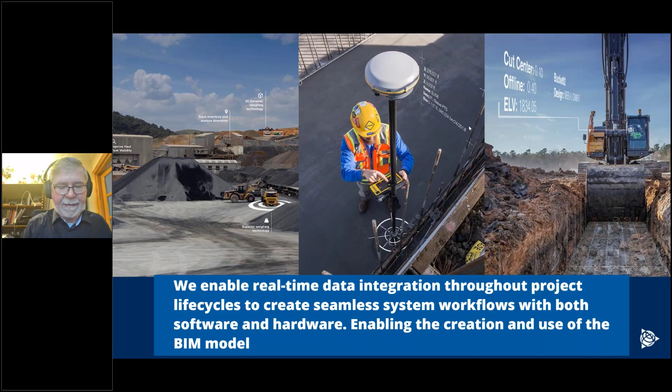Trimble has also worked over many years in completing the solutions necessary for full life cycle management. So from data collection, creating a model of the real world, preliminary design with solutions like Quantm, where you can optimize the route between 2 points, detailed design, Tekla Structures, NovaPoint,

construction itself, managing the data flow from the design to the field, to machine control systems, to surveying equipment, and data flow from the field back to the office. Scanners on machines, drones, updating the design environment.

And into the facility management phase, managing the infrastructure assets. And Trimble recently purchased a new company called Agile Assets, who have over 25 years experience in managing infrastructure.

So, on to Trimble Quadri. It has a long history, been developed within the industry by engineers for engineers. And the goal of Trimble Quadri is to provide a collaboration platform for infrastructure design, construction, and facility management, connecting the project lifecycle from start to end and from start again.

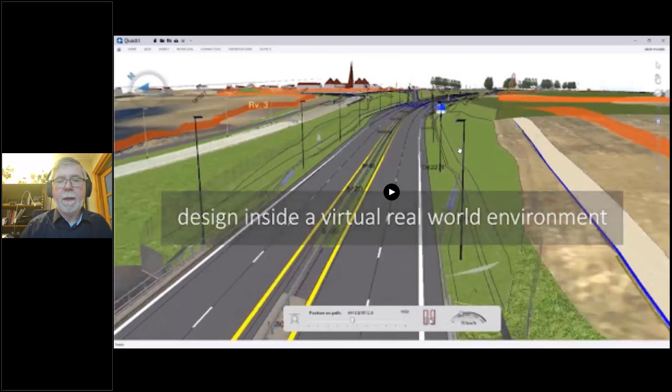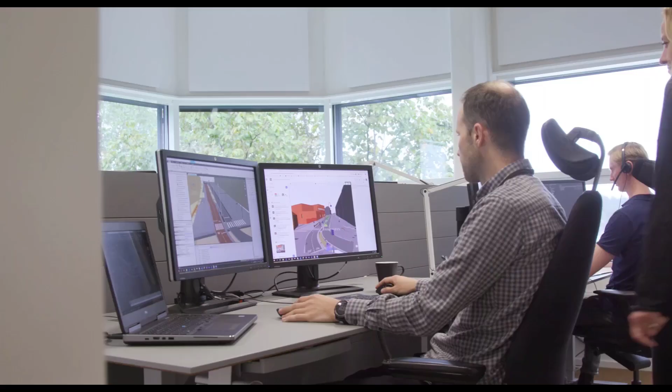A quick video just to summarize what I've been saying and what I'm going to present. To meet the current and future needs of designers, contractors, operations, and the industry as a whole, we need to work in one common data environment.

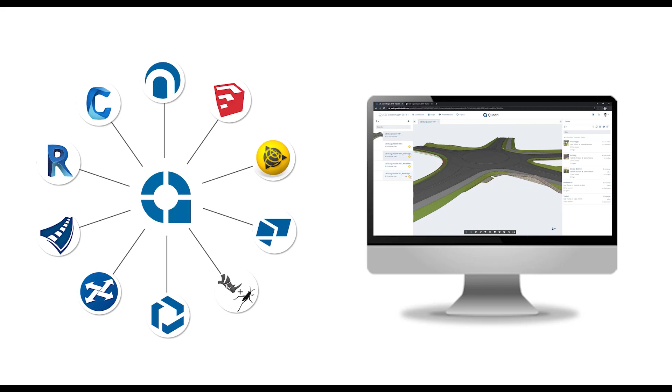Quadri enables you to communicate positioned, coherent information between all stakeholders, man and machine, throughout the project. Quadri is a BIM collaboration tool for civil infrastructure projects. It allows real-time collaboration in a central model where you keep track of changes and access the model from anywhere, at any time, and in any project, using your favorite design tool.

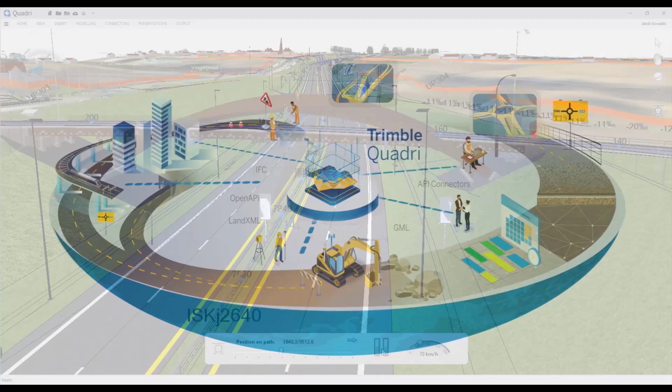With Quadri, you are in a multi-user and model environment where you can collaborate seamlessly across companies, domains, and geographical locations. This common data environment gives you access to different information from all the participants in a project.

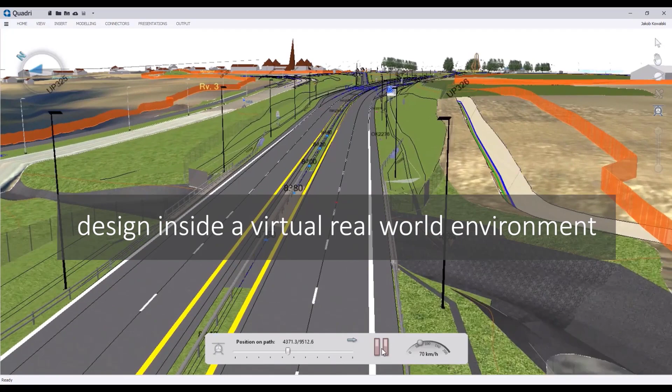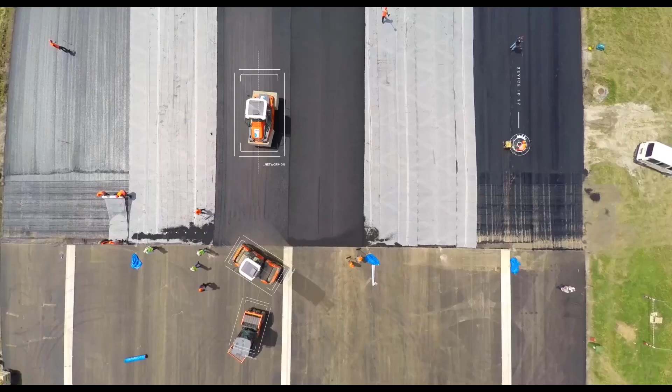The GIS world has taught us how to map the world in a unified way and how to describe the relation between real-world objects. With Quadri, we combine the power and knowledge of GIS with the geometric complexity of volume objects from CAD/BIM. When information is stored in a unified and structured way, multiple stakeholders can run their quantity takeoff, extract volumes, and export to open formats like IFC and LandXML based on geographical location. For a contractor, this means extracting the last version of all constructible data from one platform in a unified way.

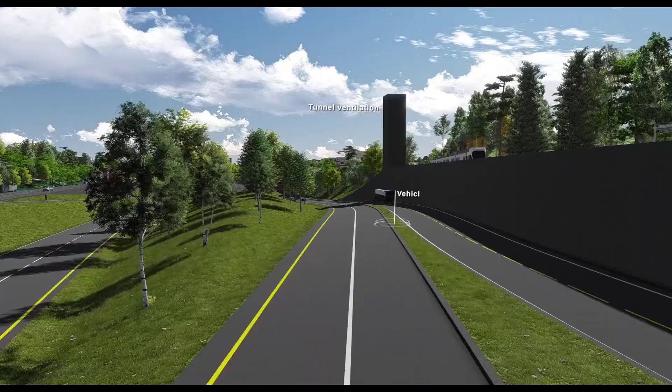Lifecycle management of infrastructure assets requires a strong ISO standard-based data model and a transportation network technology as its backbone. This is another one of the unique strengths of Quadri, bringing designers, owners, and contractors together in one unified single source of truth. As your BIM collaboration tool, Quadri sorts out the complex data exchange for civil infrastructure projects.

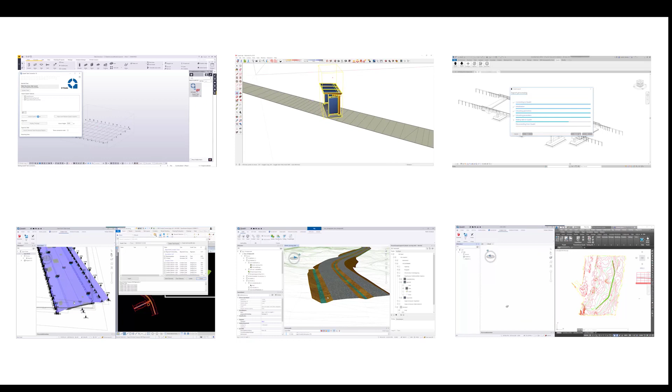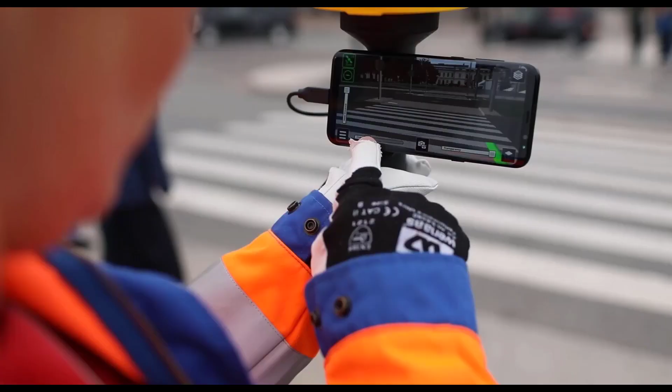By integrating digital civil construction tools of all types and from all vendors, users can easily get what they need from one another. Quadri's shared model approach delivers accurate planning and design, efficient construction, and adaptive maintenance and operations, making Quadri the collaboration platform for infrastructure. Information is available throughout the construction lifecycle.

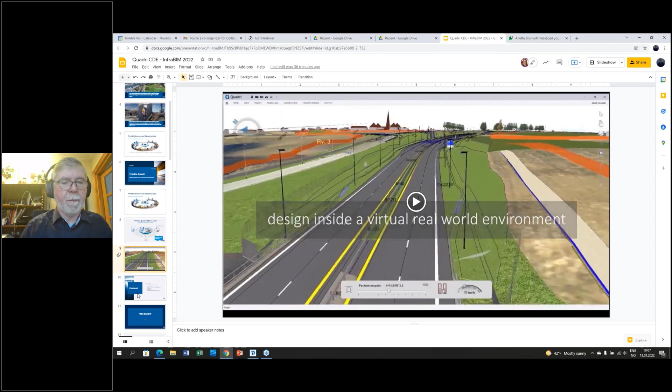So that was a summary, and now let's go into a little bit more detail. Why Quadri? As I mentioned, Quadri has been developed in collaboration with civil engineering customers over the last 25 years. It's now at its generation 4, so it has been tried and tested on thousands of projects.

Quadri has from its start been life cycle oriented. It was originally developed as part of a facility management solution for the Norwegian Road Administration. Quadri has had it as its goal to bring together a fragmented industry. The construction industry involves many disciplines, very long time frames. From an idea to construct a road or a railway, it might go 10, 15, 20 years before it's finally finished. And of course, the data loss that can occur over that period is enormous if it's not managed properly.

Quadri has always seen openness as the most important attribute. Because so many disciplines are involved in an infrastructure project, using different solutions, it needs to be open so that you can create one uniform BIM model. And of course, an infrastructure project involves many participants, up to a couple of hundred on a large infrastructure project. And they need to be able to collaborate without damaging the model for each other. And Quadri also allows this open collaboration, multiple participants, all working against the same model.

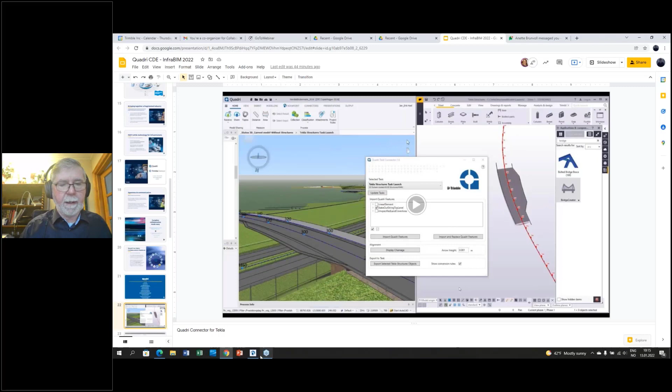Okay, I think we'll go over and have a look at Quadri itself. So this is the client version of Quadri. It's a Windows standalone application. It has its 3D viewer, of course, plan, section. So you have the ability to look at your data in all the relative projections.

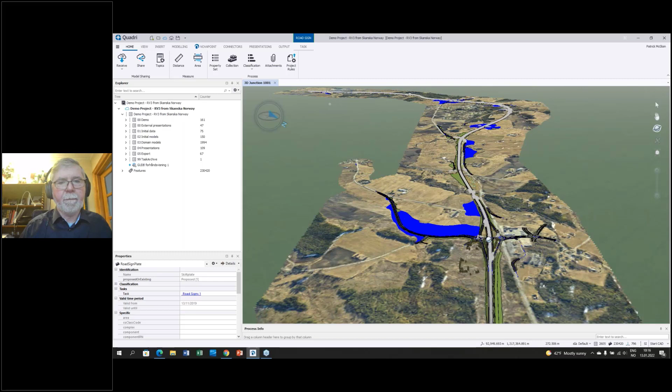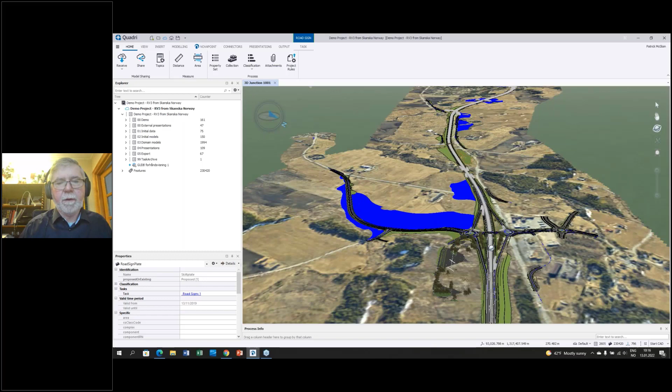So this is the 3D presentation of a 15-kilometer road project. It includes all the information necessary to build this project. And this has been produced by up to 100 designers working on the different domain areas.

If we look on the left, the Explorer window, this is the process model. And this is where all the work that has been done creating this model is recorded as a task. A task has an input, it has a result, and it has a history of when it was changed and why it was changed.

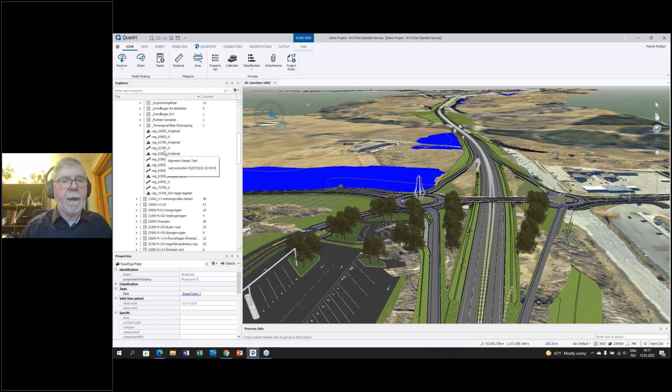If, for example, we look at the domain models, you see here that these are divided into the selections, for example, road design. And here we can see all the different roads that have been produced to fill this model. So each road has its own task, and it has an associated center line, of course. We zoom in to, for example, this area here. We can click maybe on the main carriageway here.

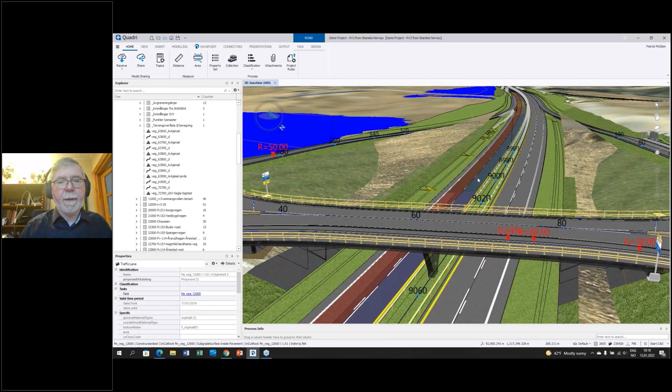And I get up in my property list the name of the feature I've selected, which is a traffic lane, and it actually tells me which task this feature came from. So it came from this road model. And as I said, this particular road model could have been created in Civil 3D, it could have been created in OpenRoads or in Trimble Novapoint.

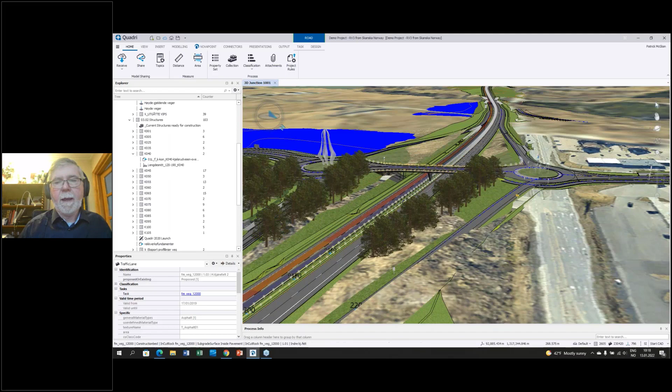So the task model takes account of all the different domains. For example, here we have the structures, and here we have actually all the different bridges associated with this project. And again, the bridges, we can have another look at a bridge here. The bridges could have been designed in multiple different solutions, Rhino Grasshopper, Revit, Tekla Structures.

And again, when I click on a bridge component, you see in the property window, it comes up as a beam. So no matter the design solution, the result is a set of objects representing what has been designed.

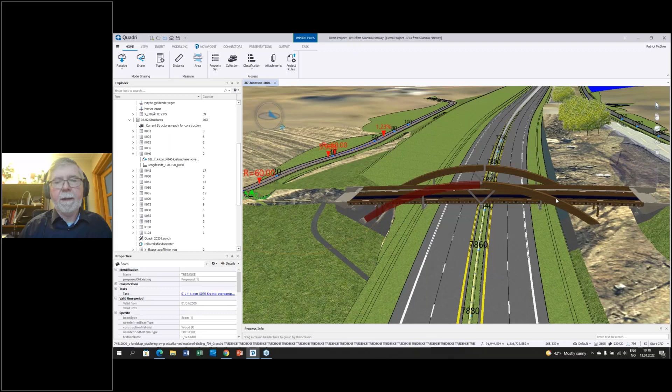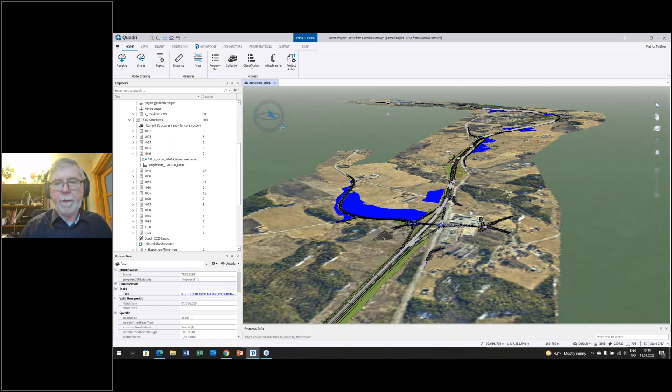We can move over here to, for example, this roundabout. And we see this roundabout has both its traffic signs, it has its road marking. If we dig under the roundabout, we can see it has the complete drainage system, manholes, drainage pipes.

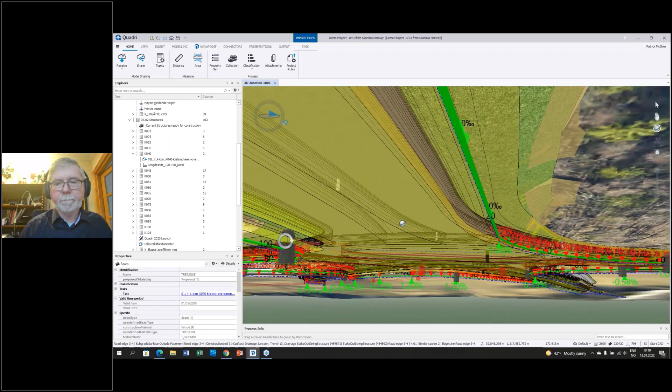And again, if we zoom into one of the objects, and I can click, for example, on the traffic sign, I see it comes here as a road sign mast. And again, it tells me which task this object came from.

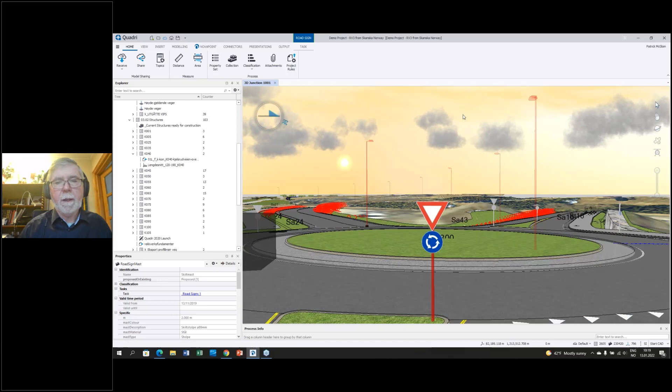So the result of this is a complete real-world model of what is and what we want to build, even down to the architectural components. So all the different domain users are working against the same model.

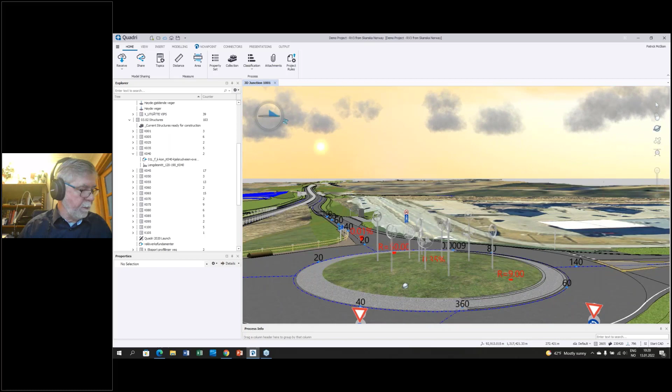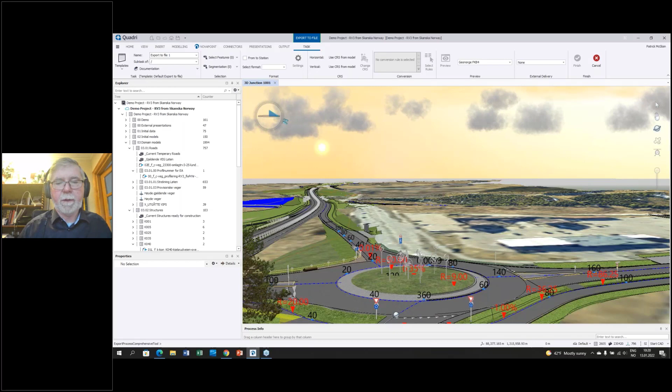The result of this is 230,420 features, which are all these objects. And then from the BIM model, we can go to our output and we can create, for example, an output file, whatever format we wish, depending on who the receiver of the data is going to be. So, for example, IFC, LandXML, directly into Trimble equipment, LandXML supporting both Leica and Topcon, so that you can select what you want to send, either for machine control systems or for survey data, to be able to set out what you've built.

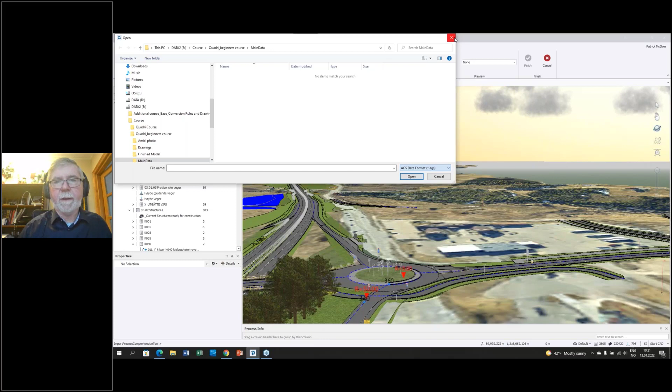And if we just look at the import, you see here that the import selects multiple file formats, and again, all the typical file formats used within infrastructure. And as I mentioned before, when you import a file, it's converted to objects, features. It also supports, for example, here we have connected, it could have been a WMS service for the existing mapping. It could have been an orthophoto that we put on our terrain surface.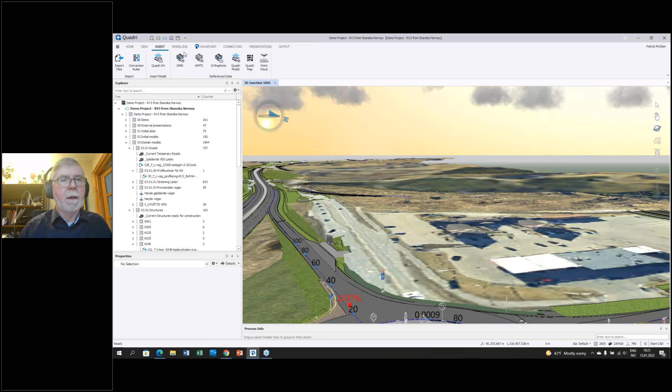Quadri also has its own modeling tools, and this is to help you to create the ground surface, to create your subsurface layers, and actually to create an accurate 3D model of the existing situation. And again, this then can be used by the external applications to build up the design components that you want included in your Quadri model.

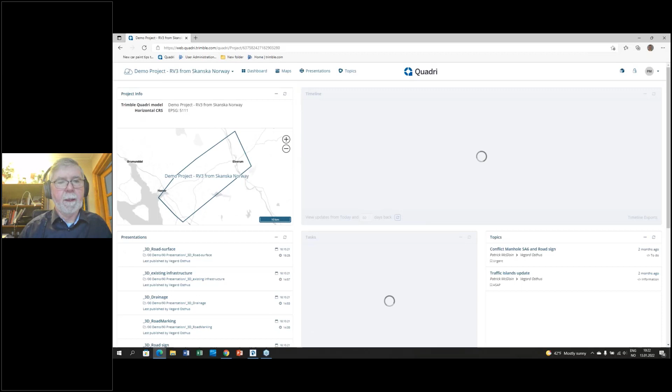I'm going to move over now to the web interface. So when I go into Quadri for browser, I receive an overview of all the projects that I have access to, where they are in the world. Then I can go into this particular project that we've been looking at now. It opens a dashboard. It tells me where the project is. It gives me access to all the 3D presentations that have been published to the web. It gives me access to the same task tree that we were looking at here, so that I can see everything that's been produced in the BIM model.

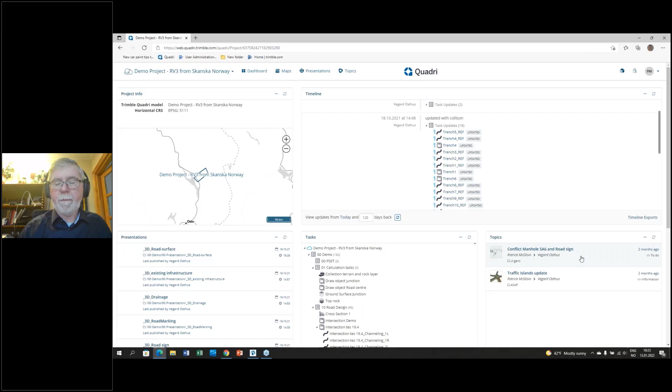It gives me access to the timeline, so all the changes that have been made to this model from when it started. And I can see who made a change, what changes they made, which tasks have been updated. I can also both send topics or receive topics from the client version in the web version.

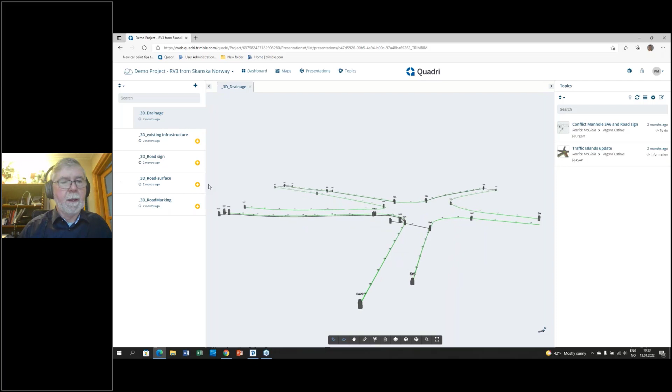If we now go and look at the presentations, just to give you an idea how the presentations work. For example, if we begin here and look at the road drainage on the roundabout that we were looking at. So now I get a presentation of the road drainage. But I can also add, for example, the traffic signs. And now I can see the traffic signs and the road drainage together. I maybe would like to see how this is related to the existing infrastructure in this area. And then this appears. And of course, I can turn on and off the presentations as I wish, which gives me great control over the different domains involved in the design.

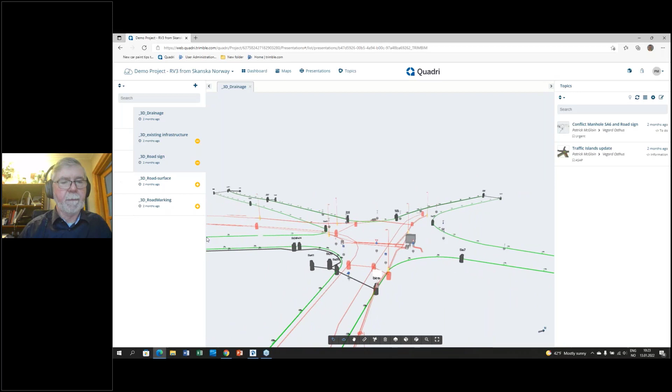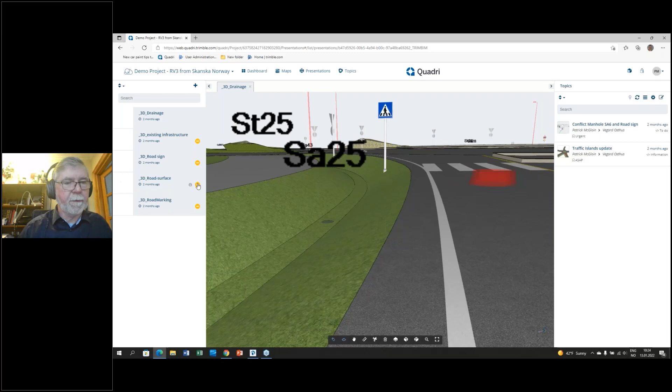We can now maybe add the intersection itself and maybe add the road marking on top of that. So here I see existing manholes that are higher than the designed road, but here I have my designed manholes, and we can just turn off the road surface again, and I can see that they're correctly aligned vertically. So this is what I wanted to show you during this short presentation.

Quadri is used by over 10,000 users and has been used on tens of thousands of projects; this version of Quadri has been in use maybe for the last 6 years. It's widely used, particularly in the Nordics and in Northern Europe, Belgium, Norway, Sweden, Denmark, Finland, and it has been recently introduced to the rest of Europe with a particular focus on France and the UK.